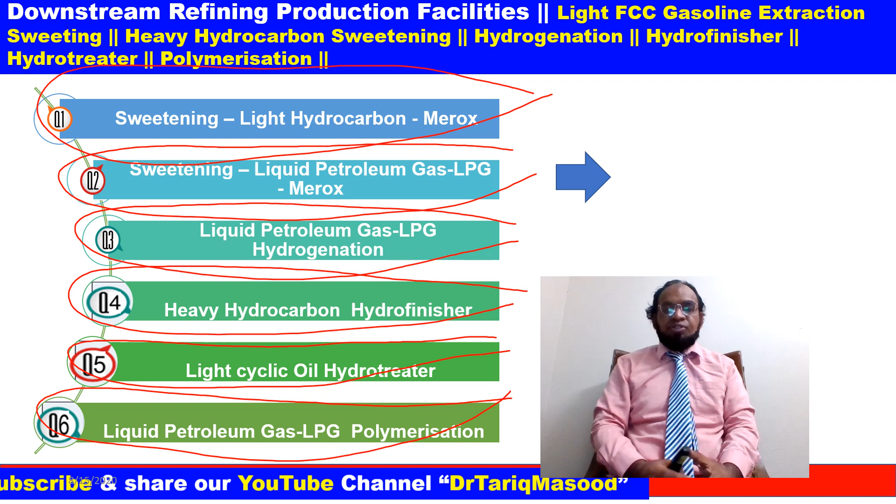So probably you will find a lot of interesting outcomes and interesting theories about these, and we will also run some artificial models we have developed to understand how each unit is performing. What is the ultimate goal? Shaping the clean and sustainable global energy delivery. So the plan is to deliver more than 300 lectures in the next couple of years.

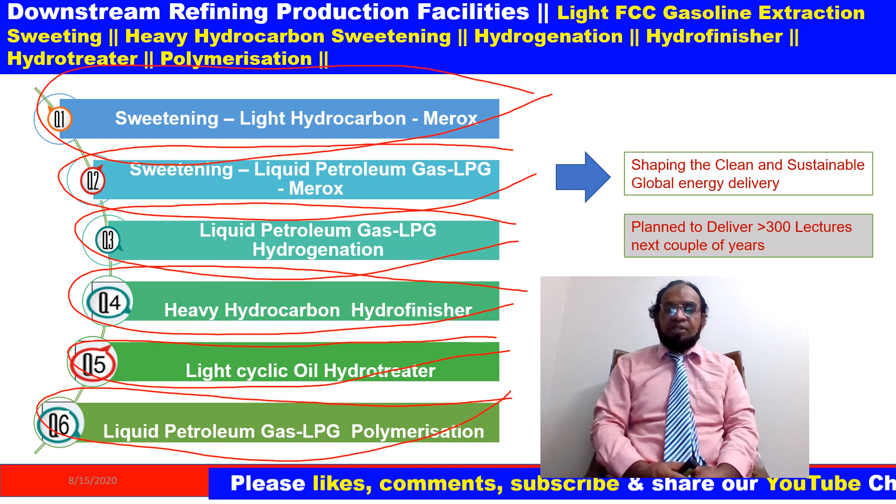Okay, refining production facilities, light FCC gasoline extraction and sweetening, theoretical descriptions of the sweetening process, lecture number 3. Key takeaway points from lecture number 3, downstream refining production facilities. We will discuss process descriptions, chemical reactions, and five vital variables.

Okay, theoretical description of the sweetening process. What we're going to discuss: mercaptans, disulfides, sulfur content, continuous injections, dilute sodium hydroxide. In Merox units and all sweetening type units, the mercaptans are converted directly to disulfides, which remain in the product.

There is no reduction in the total sulfur content, but because the vapor pressure of the disulfides is so low relative to that of the mercaptans, their presence is much less objectionable. The Minalk process relies on small continuous injections of an appropriate strength alkali solution rather than gross intermittent alkali saturation of the catalyst bed as used in the conventional Merox fixed bed sweetening unit.

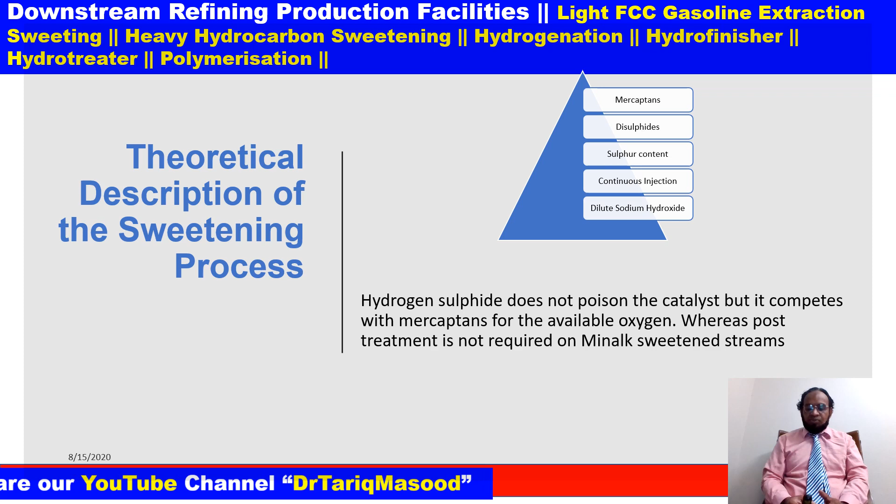Hydrogen sulfide does not poison the catalyst, but it competes with mercaptans for the available oxygen. Post-treatment is not required on Minalk sweetened streams. Okay, now I'm going to discuss the chemical reactions of a sweetening unit. The name Merox originates from the function of the process itself, namely the conversion of mercaptans by oxidation.

Okay, this is my mercaptan and then oxidation process, and it converts into disulfides. The word mercaptans is a descriptive name applied over 140 years ago to organic compounds with the sulfhydryl function, that is SH, and derived from the Latin mercurium captans due to their mercury seizing properties.

Today, most of the research literature assigns the word thiol for this functional group. In the common system used by the petroleum industry, mercaptans are named after their analogous alcohol counterparts. The CH3SH by the common system is methyl mercaptan, just as one would name an alcohol having the formula CH3OH methyl alcohol. The systematic name is methanethiol.

Likewise, n-butyl mercaptan becomes 1-butanethiol. Tert-butyl mercaptan becomes 2-methyl-2-propanethiol. The aryl mercaptans are commonly called thiophenols, while in the formal system as used by Chemical Abstracts, these compounds are benzenethiols, toluenethiol, etc. The description uses the common mercaptan terminology as practiced in the petroleum industry.

Okay, from the next slide, we will discuss sweetening and the further extraction process and then their key parameters. Okay, what is the treatment process? Basically, it comprises 3 segments: extraction, reaction, caustic regeneration. In the light gasoline treatment process, the system extracts and converts mercaptans into disulfides which remain in the product. Following are the key processes to treat sour gasoline product.

Sometimes a pretreatment is required based on the feed characteristics. If H2S, hydrogen sulfide, is present at a low ppm level inside the light hydrocarbon, this must be passed through the caustic scrubber to ensure complete removal of hydrogen sulfide from the feed. This does not poison the catalyst, but it competes with mercaptan for the available oxygen.

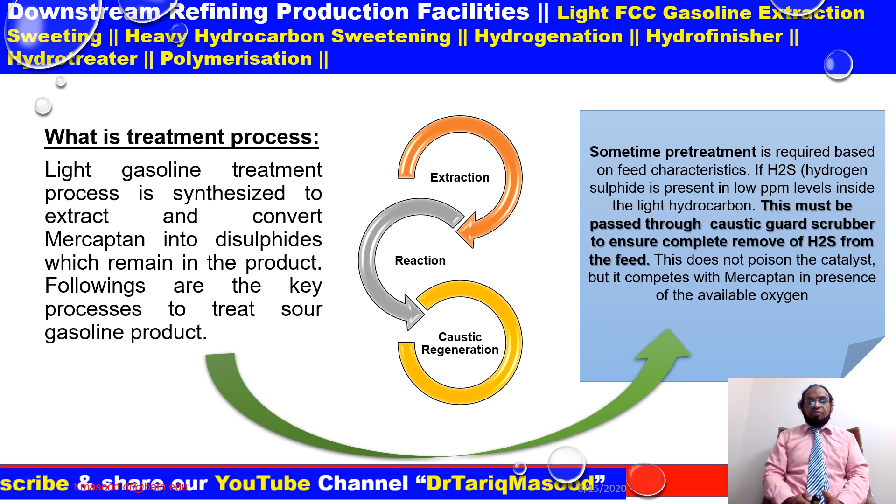Okay, furthermore, the Merox process in all its applications is based on the ability of an organometallic catalyst to accelerate the oxidation of mercaptan to disulfide at or near ambient temperature and pressure. In the sweetening reaction, a hydrocarbon containing mercaptans is brought in contact with the caustic soda solution, air, and catalyst to convert the mercaptan to oil-soluble disulfide without changing the sulfur content of the hydrocarbons.

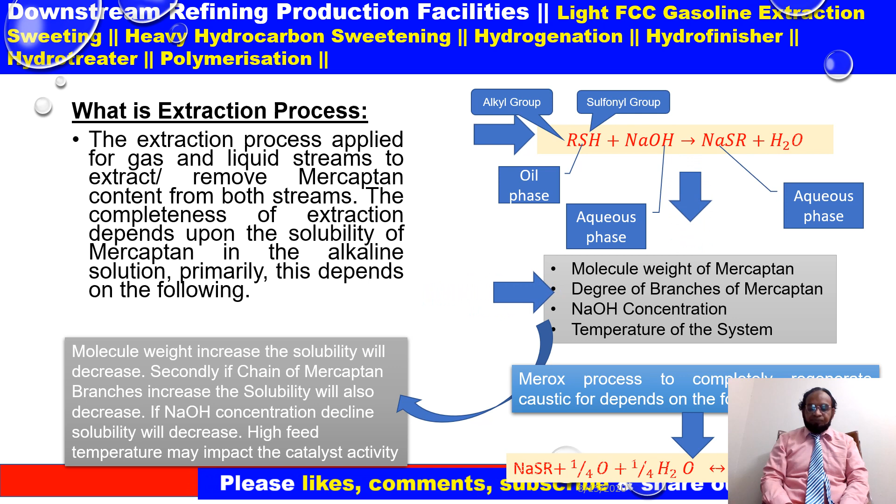As discussed in my earlier slide, of course nothing can be done to control the molecular weight of the mercaptan present, as this is a function of the crude source and distillation of the feed. However, for mercaptans of the same molecular weight, primary mercaptans will be most completely extracted, secondary mercaptans less, and tertiary least. It is a function of the feedstock.

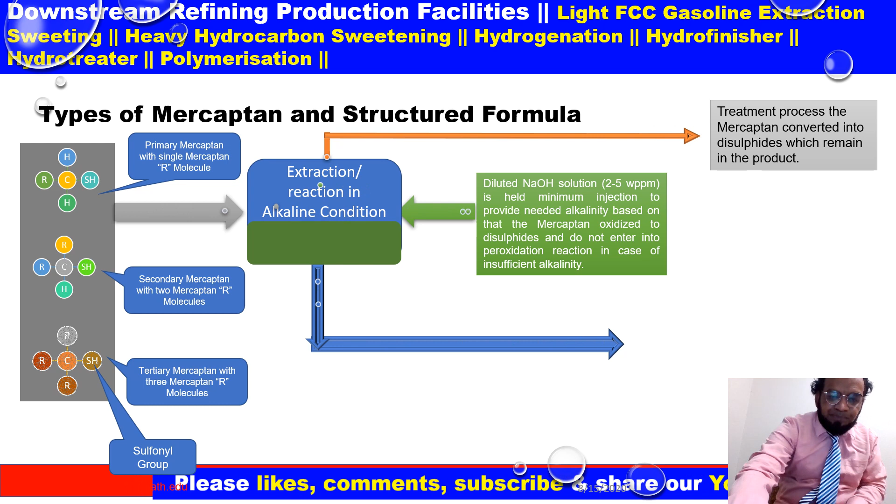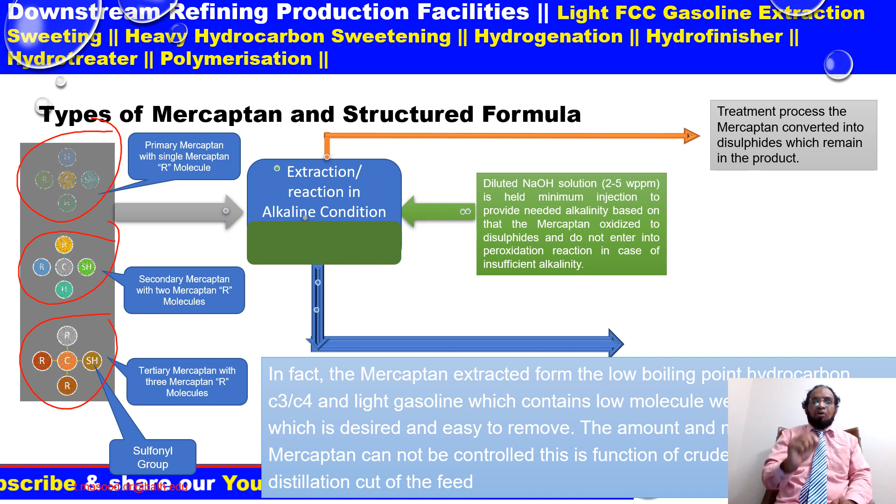As you can see here, my primary mercaptan contains 1R, secondary 2R and tertiary 3R. R is a hydrocarbon chain, as we discussed in my earlier slide, straight or branched chains. Because of these factors, mercaptan extraction is used mainly for low boiling range petroleum fractions such as C3, C4, and light gasoline, which only contain low molecular weight mercaptans and where reduction in the sulfur content is needed or desired.

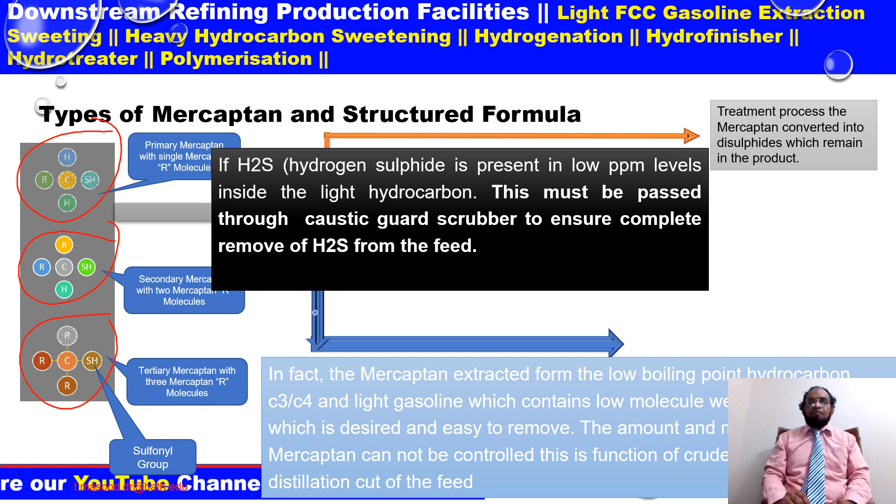If hydrogen sulfide is present at a low ppm level in the light hydrocarbon, it must be passed through the caustic scrubber to ensure complete removal of hydrogen sulfide from the feedstock. Now we're going to discuss five key operating variables for a treatment process, the major Merox process variables and their effect on performance. Specific emphasis will be placed on identifying the optimum operating conditions: catalyst, oxygen, alkalinity, contact and heat.

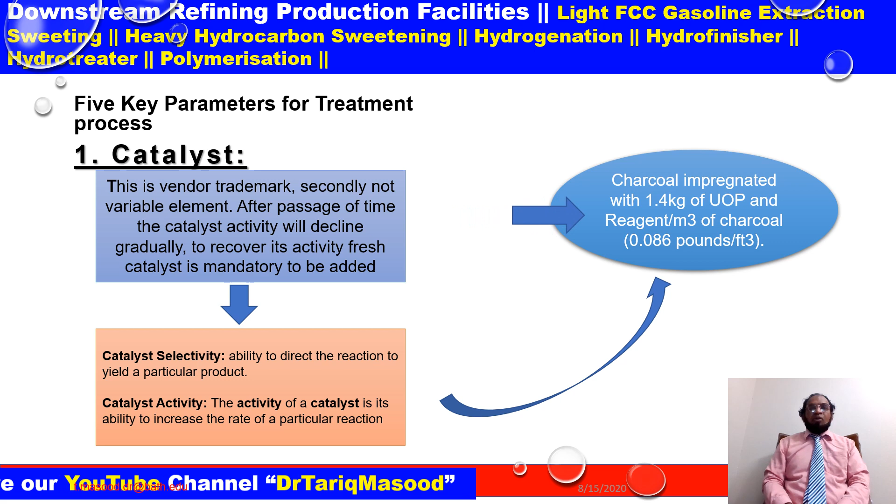First, catalyst concentration. For the Merox unit, the catalyst concentration is not a variable. The charcoal should be impregnated with 1.4 kg of UOP Merox reagent per cubic meter of charcoal, or 0.086 pounds per cubic foot. Over the course of a run, catalyst activity will gradually decline. When deactivation reaches an intolerable level, reactivation with additional catalyst should be conducted. In the next slide, we'll discuss oxygen injection.

Now we are going to discuss oxygen injection. Oxygen is supplied to all versions of the Merox process in the form of compressed atmospheric air. The stoichiometric or theoretical amount of oxygen necessary is 0.25 kg per kilogram of mercaptan sulfur, or 0.25 pounds of oxygen per pound of mercaptan sulfur, at standard conditions of temperature and pressure. 1 cubic meter of atmospheric air contains about 0.28 kg of oxygen; 1 cubic foot contains about 0.018 pounds of oxygen. Therefore, about 0.88 standard cubic meters of air are needed for each kilogram of mercaptan sulfur to be oxidized.

It is of course necessary to have at least a slight excess of oxygen present, but it is always recommended to keep the excess to a minimum. The amount of excess air injection necessary is highly dependent upon the individual feedstock, but normally ranges between 1.2 to 2 times the theoretical requirement. Thus, a good initial injection rate of 1.5 times theoretical may be calculated with the formula given. The parameters are the air injection rate in SCFH, K constant factor, feed rate, specific gravity, and mercaptan sulfur, that is RSH.

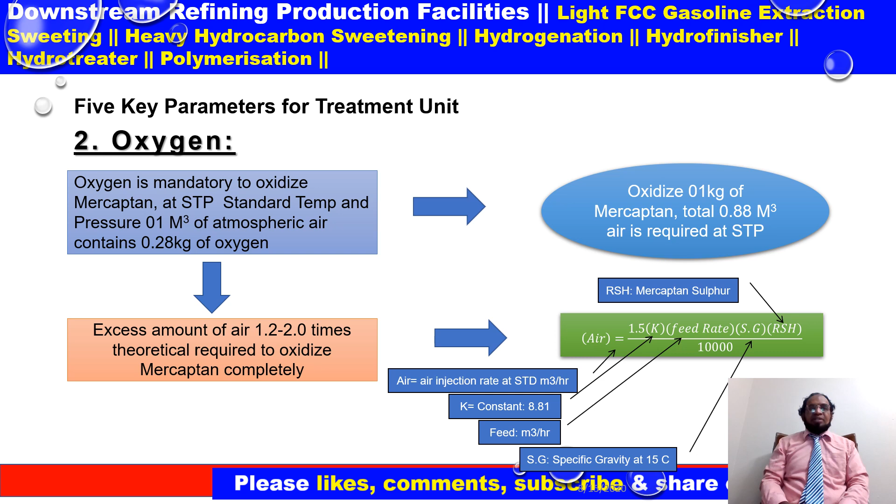Alkalinity. Alkalinity is needed to selectively drive the mercaptan oxidation reactions. Alkalinity is provided by aqueous sodium hydroxide or caustic solution. The mercaptans encountered in the feed to Merox units are typically so readily oxidized that very little alkalinity is required. Only sufficient caustic should be injected to maintain the drain effluent at 9 to 12 pH, about 2 to 10 ppm of sodium hydroxide. A caustic concentration of 3 to 5 Baumé, or 2 to 3 weight percent, is normally sufficient.

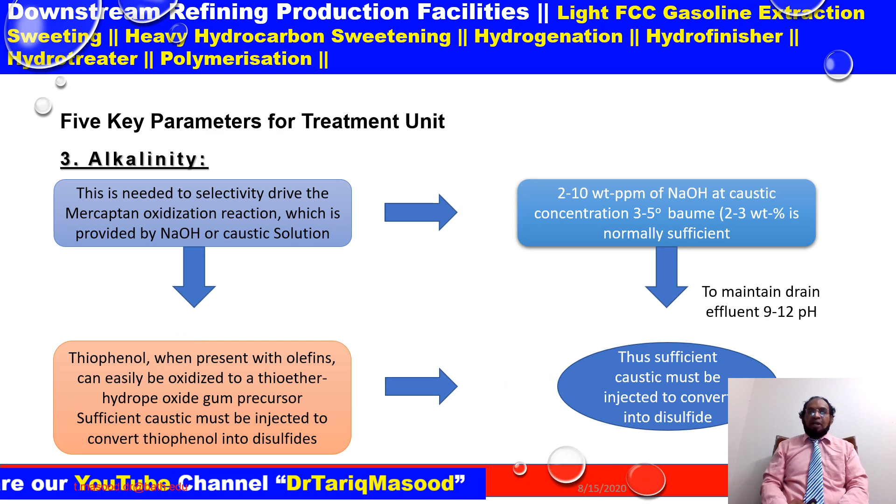However, one other factor must be considered. Thiophenol, when present with olefins as in catalytically cracked gasoline, can be easily oxidized to thioethers, hydroperoxides, and gum precursors. Caustic, by transferring the thiophenols to the aqueous phase, will prevent this peroxidation. Thus, a sufficient quantity of caustic must be injected to tie up all of the thiophenol present in the feed until it can be converted to disulfide.

As we have seen here, experience has shown that this quantity of caustic injection need not necessarily be a stoichiometric amount. A single molecule of caustic will arrest hydroperoxides for many molecules of thiophenol. The tendency to form gum via this mechanism may be monitored with the peroxide number test. A sufficient quantity of caustic injection should be maintained to yield a peroxide number of 0.3 or less.

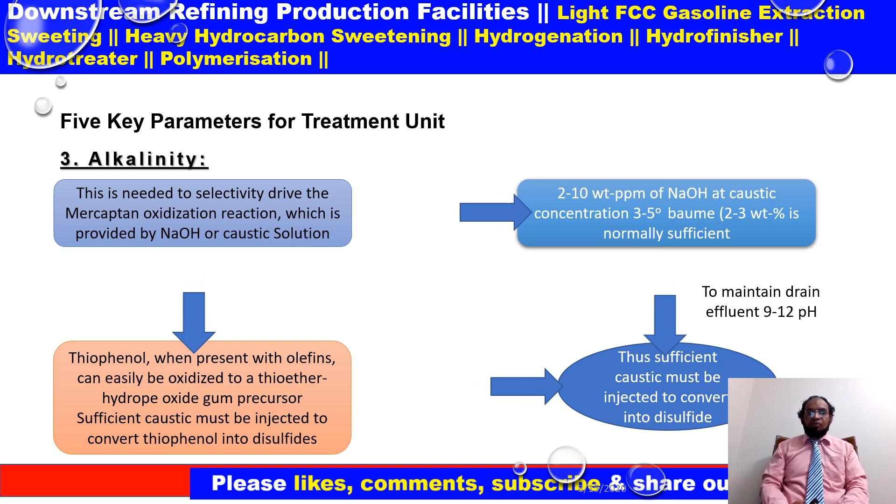Of course, any acids present in the feed lead to caustic neutralization, and if caustic is neutralized, it must be replaced in order to maintain acceptable operation. From my next slide, we will discuss contact.

Now we're going to discuss contact. Contact may be defined as the intimacy of mixing of the reactants. Contact is accomplished by one of several means. Contact can be characterized by duration of mixing time, by volumetric ratio of the reactants, or by differential pressure, which implies degree of dispersion with fixed flow restriction. The differential pressure is directly related to the linear velocity. Thus, velocity is often taken to be a process variable.

The primary source of contact in a fixed bed unit is the charcoal bed itself. The porous structure of the charcoal provides the vast interfacial surface area necessary for contact between the hydrocarbon, caustic, and catalyst. The variable used to characterize contact is residence time in the charcoal bed. The residence time is often expressed in terms of volume of feed per hour per volume of catalyst bed. The common term for this is liquid hourly space velocity, also known as LHSV. As residence time increases, LHSV decreases, and mercaptan conversion increases.

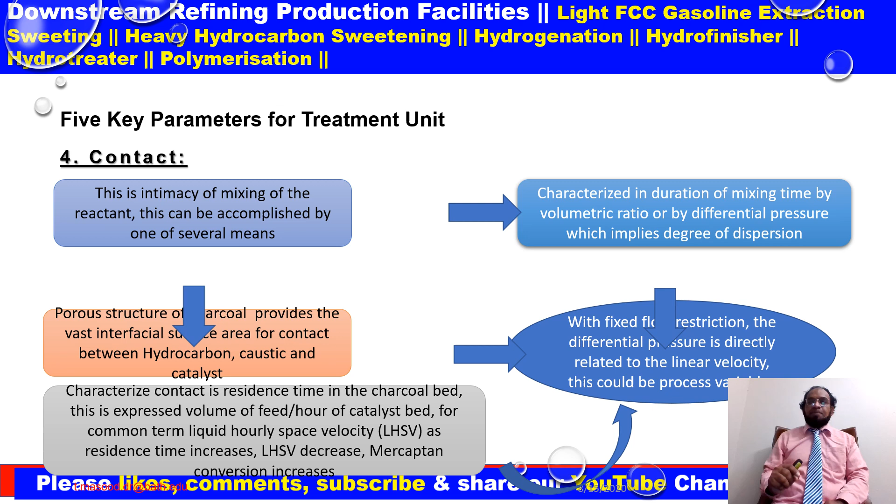As the catalyst bed accumulates running time, the charcoal pores tend to plug and become blinded by extremely heavy hydrocarbon molecules. This reduces contact and is largely the cause of fixed bed deactivation. Fixed bed deactivation results in high mercaptan content in the product, which will not respond to corrective actions. As a result, either reduced feed rate for lower LHSV or catalyst bed reactivation will be required. From the next slide, I'm going to discuss heat, temperature.

This is my last slide. The fifth key parameter for the treatment unit: heat. Merox fixed bed sweetening is favored by high temperature. Increasing the hydrocarbon feed temperature increases the rate of mercaptan conversion. However, increasing the temperature will also enhance other oxidation reactions, which may be undesirable because of color deterioration, gum precursor formation, and premature catalyst bed deactivation.

Therefore, the feed temperature should be kept as low as possible while still maintaining the desired degree of mercaptan conversion. Normally, this is in the range of 38 to 50 degrees Celsius. Temperature is also limited by storage considerations such as the flash point or vapor losses. Feed temperature in excess of 60 degrees Celsius for a long period should be avoided because of metallurgical considerations.

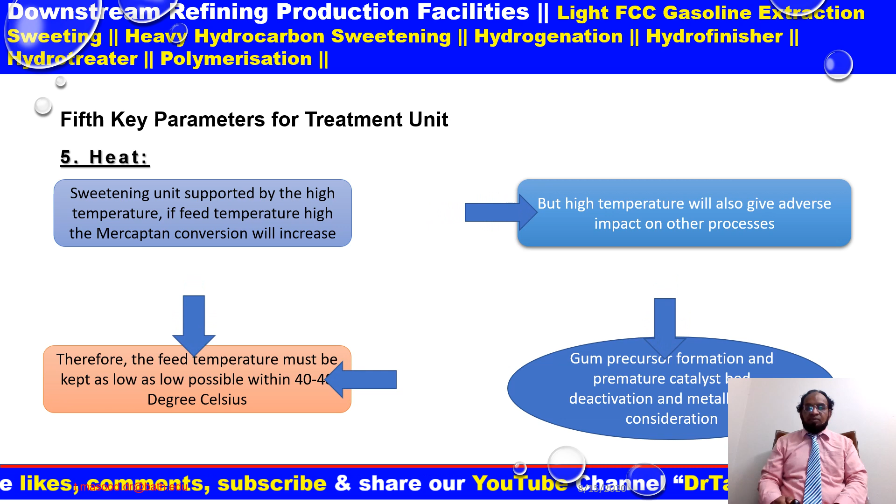From my next slide, I'm going to conclude, and then we will demonstrate what we have planned to demonstrate in my next lecture. Conclusion: today we have discussed the process description, chemical reactions, and vital key parameters. Next topic, we are going to discuss material and heat balance.